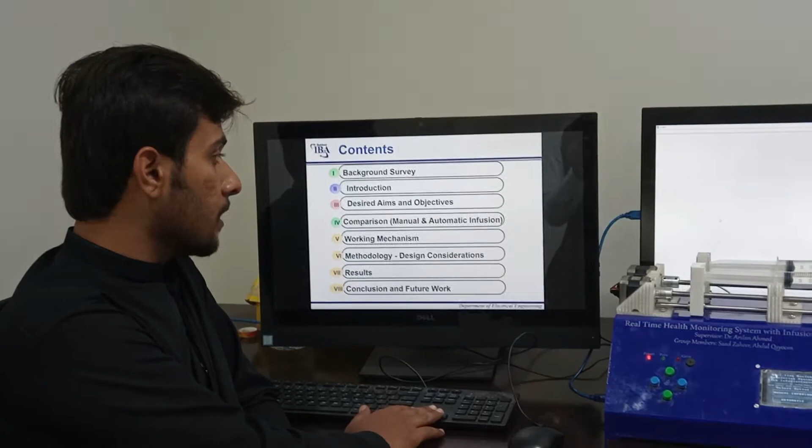The contexts which we will be dealing in today's presentation are the background survey of our project or our research, introduction, desired aims and objectives, comparison between some manual infusion systems and automatic infusions. Moreover, we will be also dealing with the working mechanism, methodology, design considerations, results, and in the ending part we will be dealing with the conclusion and some future works.

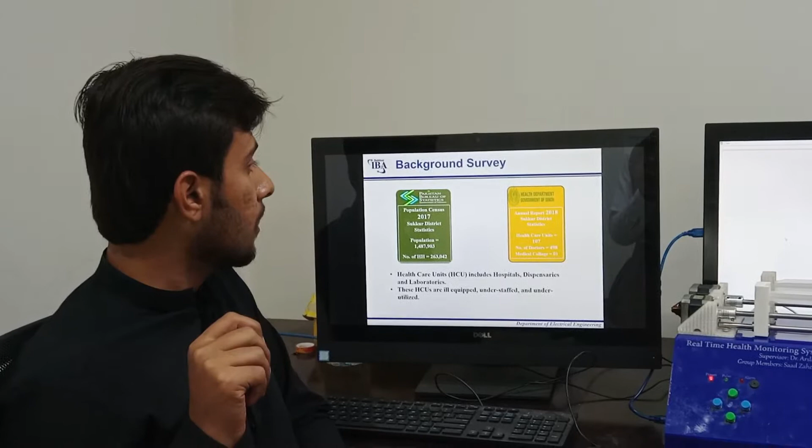If we talk about some background survey related to our health sciences, then in the 2017 census, the documented population is around 14,87,903 persons who are currently registered with the statistical census of Sukkur, and the number of households we can say is 2,63,042 houses. These statistics are being provided by the Pakistan Bureau of Statistics, Government of Pakistan, and from the Health Department of Sindh. We have received an annual report from 2018 that we have only 107 healthcare units, meaning directly or indirectly these healthcare units are the hospitals, dispensaries, and healthcare sectors, in which a total of 498 doctors are registered, and we have only one medical college in the vicinity of Sukkur district.

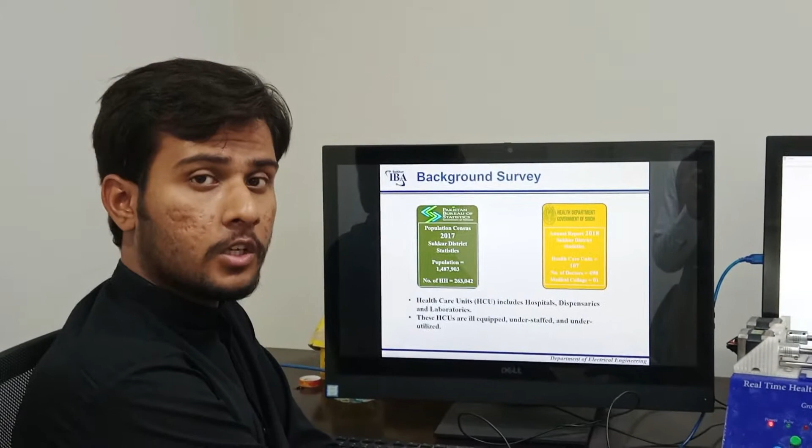If we talk about some background survey related to the intravenous infusion on which our project is based, intravenous infusion is the controlled supply of fluid, or we can say it is prescribed medication which is continuously infused into the bloodstream over time, which is the fundamental part of every healthcare unit.

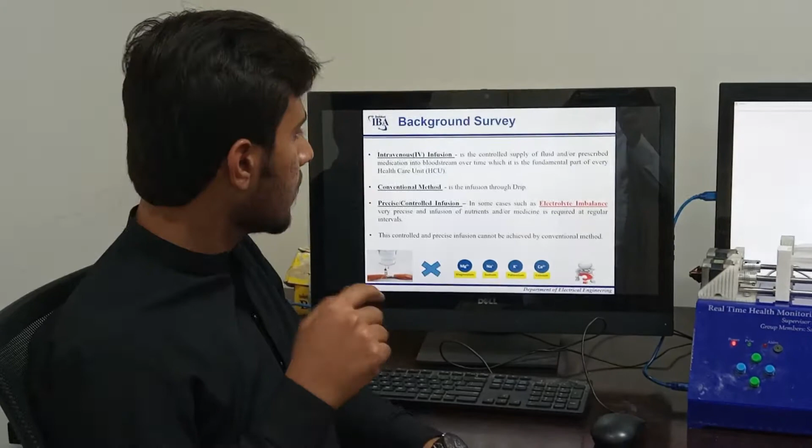The conventional type of infusing the medication, or the liquid medications, are the normal drip systems. We are moving towards automated or controlled infusion systems because in some types of diseases we need precise and controlled infusions. We can take the example of electrolyte imbalance, a common disease which needs very precise and accurate infusion of the nutrients or medicine required at regular intervals. This is the reason due to which we need controlled and precise infusions, which till now the conventional drip systems haven't achieved.

Some manual adjustments require someone constantly on site to keep the infusion flow rate constant and to prevent situations of over and under infusion. For cases that require programmed medicine or nutrition volume, infusion pumps provide constant flow rates. Such equipment, however, is very expensive, as well as becomes uncomfortable for patients, involving involuntary movements.

When we visited Civil Hospital Sukkur, we saw that there is much need of well-equipped equipment which we can provide, with which we can provide instant medications, as well as proper monitoring of the patient's health for the concerned doctor as well as the relatives. In addition, if we talk about different scenarios, we have seen in Sukkur district there is only one public sector hospital named NICVD, which has well-equipped machinery or equipment for which they can...

We are having examples like syringe pumps, health monitors, etc. This is the only hospital situated in the vicinity of Sukkur which has this, in a very limited amount. Moreover, all other hospitals have a deficiency of well-maintained setup for the local citizens also.

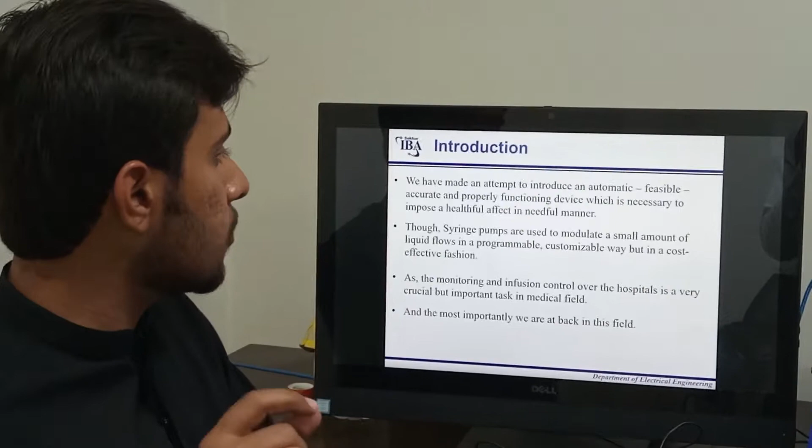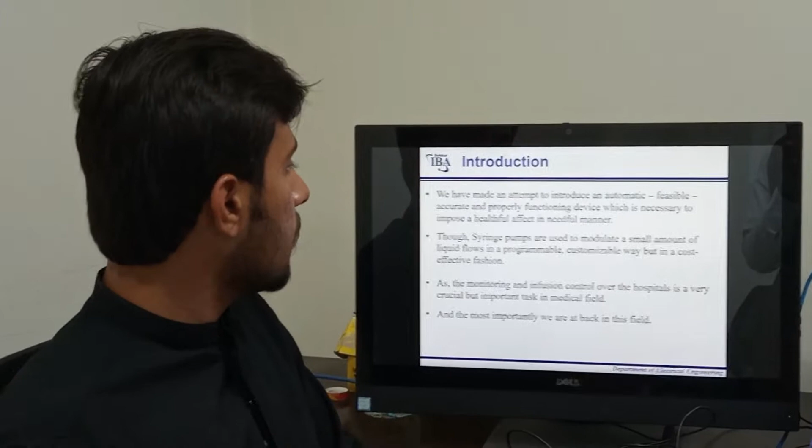If we talk about the introduction, we have made an attempt to introduce an automatic, feasible, accurate, and properly functioning device which is necessary to impose a healthful effect in a needful manner. If we talk about the syringe pumps, which is the main topic of our presentation, they are used to modulate a small amount of liquid flow in a programmable, customizable way, but in a very cost-effective fashion, which is the main point of this presentation.

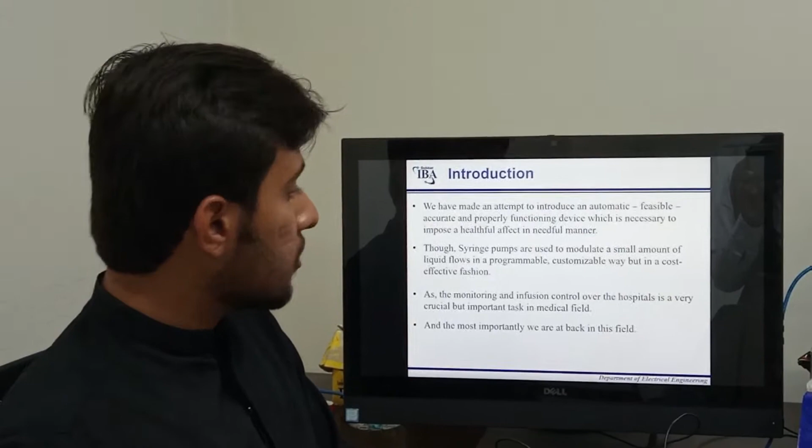As the monitoring and infusion control over the hospitals is a very crucial but important task nowadays, and most importantly, in the vicinity of Sukkur, we are very behind in this field.

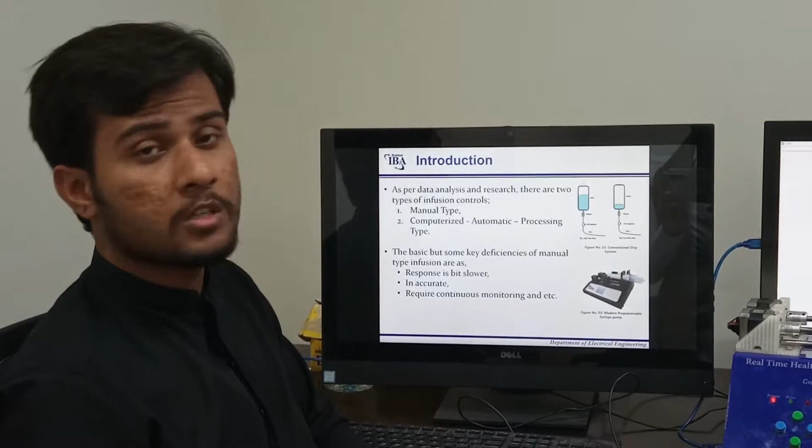If we talk about some research related to our project, the data analysis and research show there are two types of infusions: number one is manual type, number two is computerized or processing/programmable based.

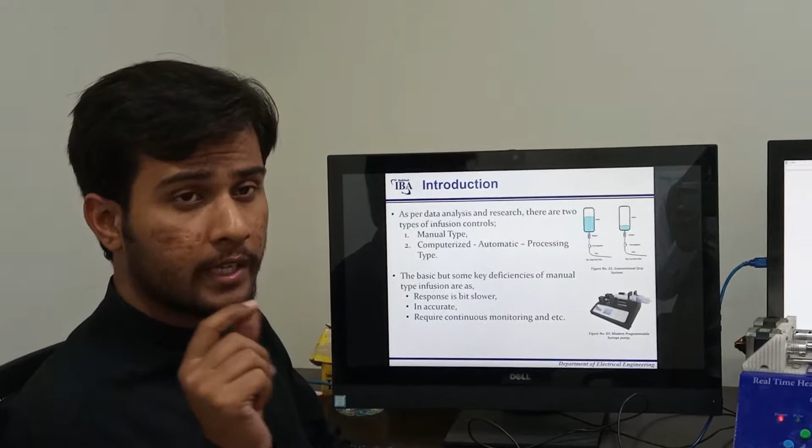The deficiencies in conventional systems are that their response is a bit slower than nowadays requirements. They are also inaccurate, and most importantly, they require a continuous monitoring setup over the system.

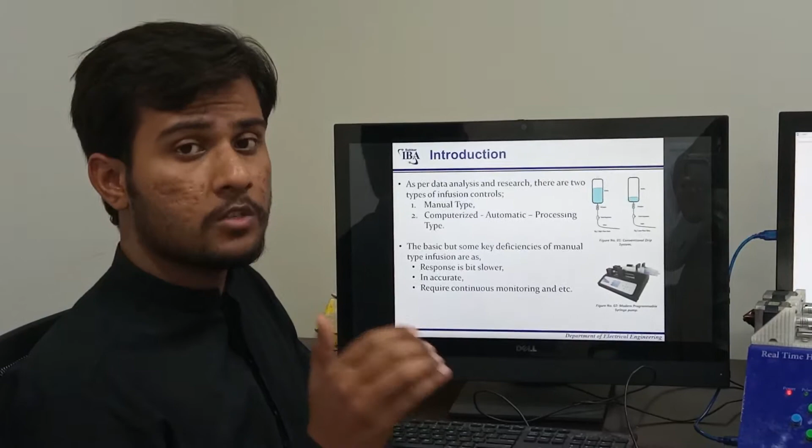In this presentation, we will be dealing with our aims and objectives, like providing a smart health system for private as well as public sector hospitals, which can provide a user-friendly interface for continuous monitoring of patients.

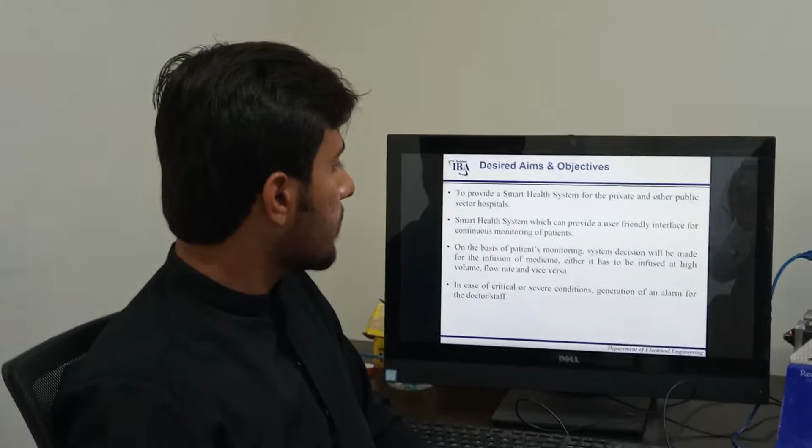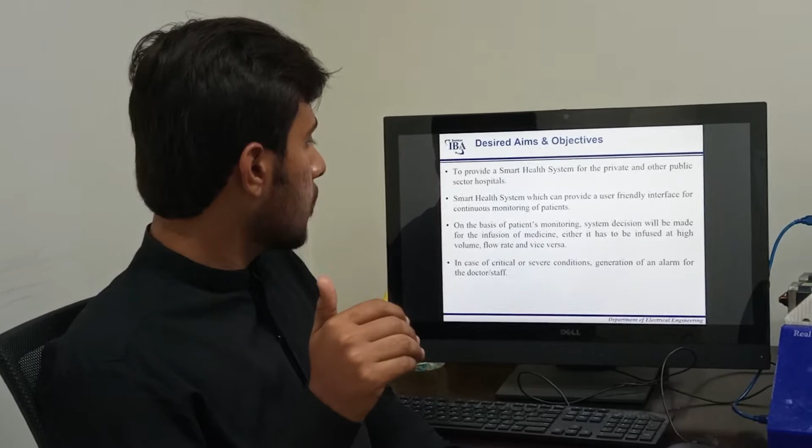Based on the patient monitoring system, a decision will be made for the infusion of medicine, either at high volume flow rate or vice versa. Moreover, in case of critical or severe conditions, generation of an alarm for the doctor is also an objective of this task.

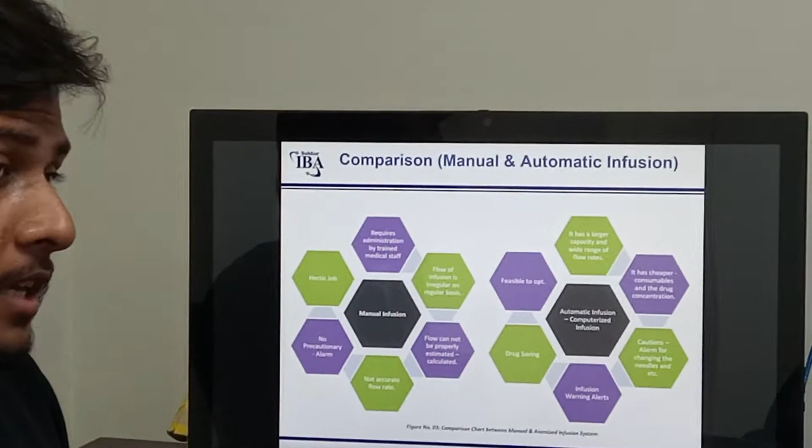Now, if we talk about the comparison between manual and automatic infusions: in manual infusion, we require administrative staff, and this is a very hectic job. Thirdly, it does not hold any precautionary alarms for severe conditions.

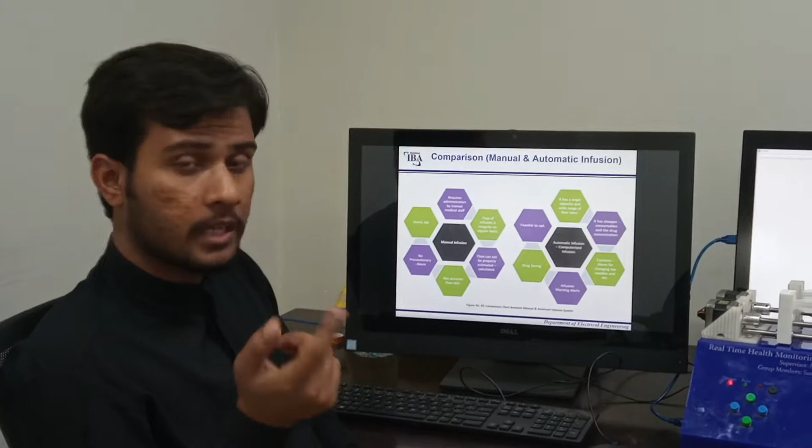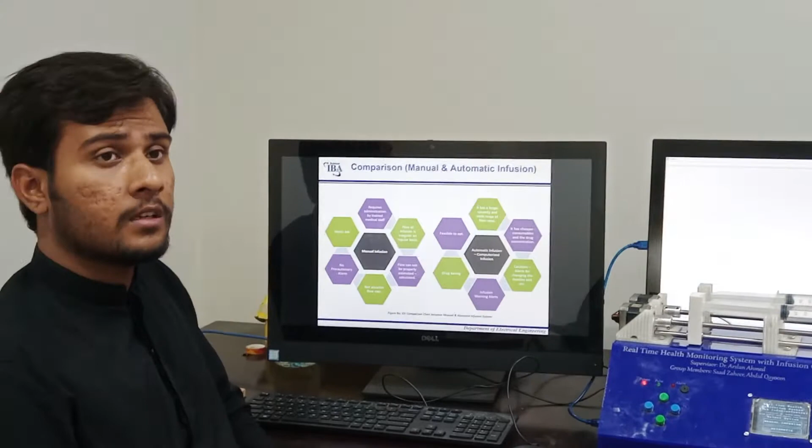Fourthly, the flow of infusion is irregular on a regular basis. Fifth, the flow cannot be properly estimated or calculated if we require a calculated and estimated infused volume. Finally, these systems are not very accurate in terms of constant flow rates.

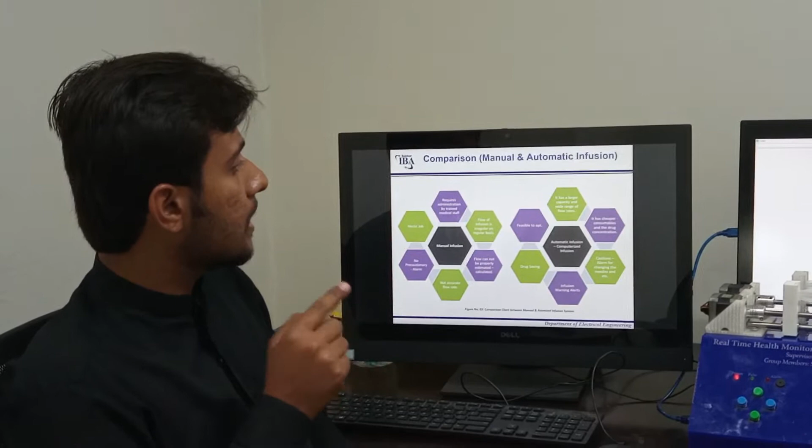Now, if we talk about automatic or computerized infusion systems, they have larger capacity and a wide range of flow rates. Secondly, they are feasible to opt for in normal situations.

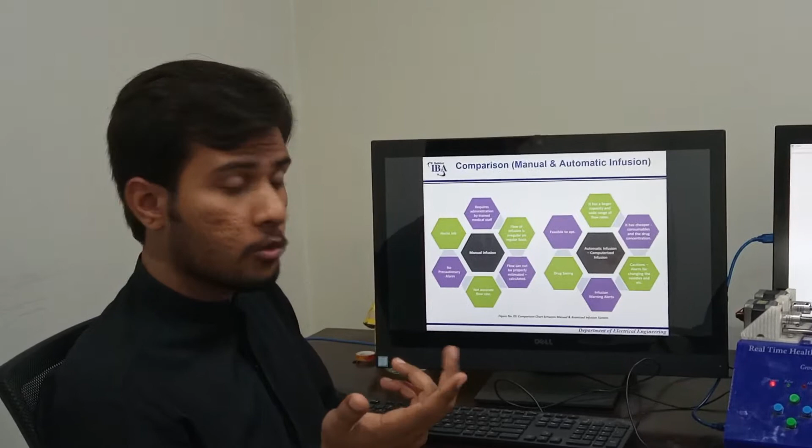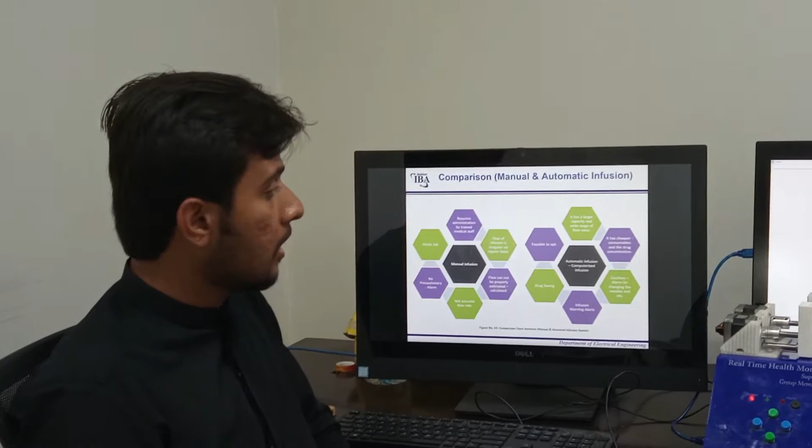Moreover, they are drug-saving equipment. Fourthly, infusion warning alerts are there, with features of caution or alarming in alarming situations. Finally, they are much cheaper compared to the conventional drip system overall.

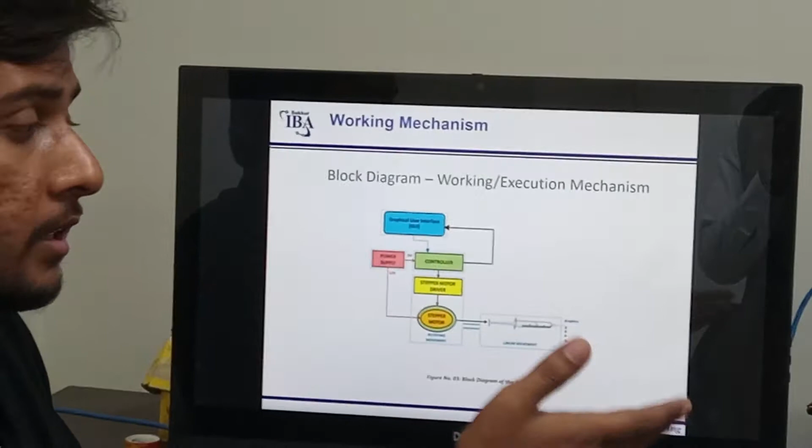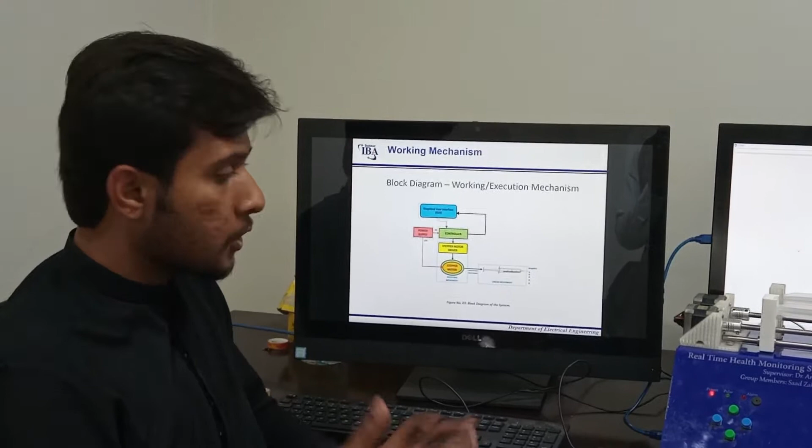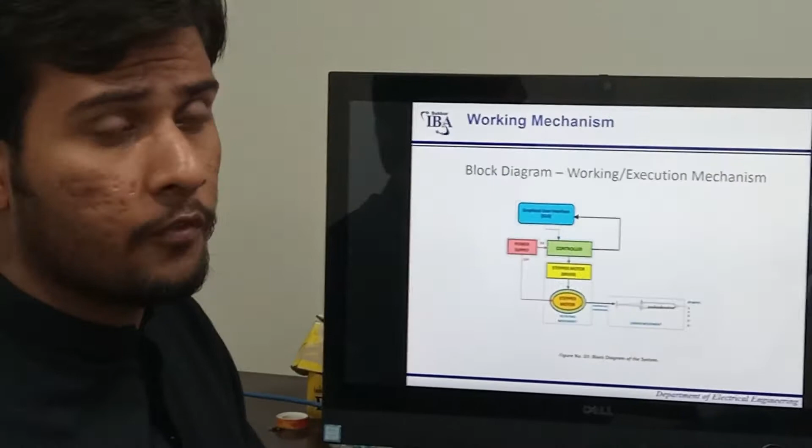This is basically the working mechanism of our project, or the prototype we have designed for this case. We will be using a graphical user interface, power supplies, controller-based boards, motor drivers, motors, and finally the most precious part of our project, the pump, or syringe pump.

So the next part will be defined by my groupmate with the methodology part. The mechanism of our project is divided into hardware and software.

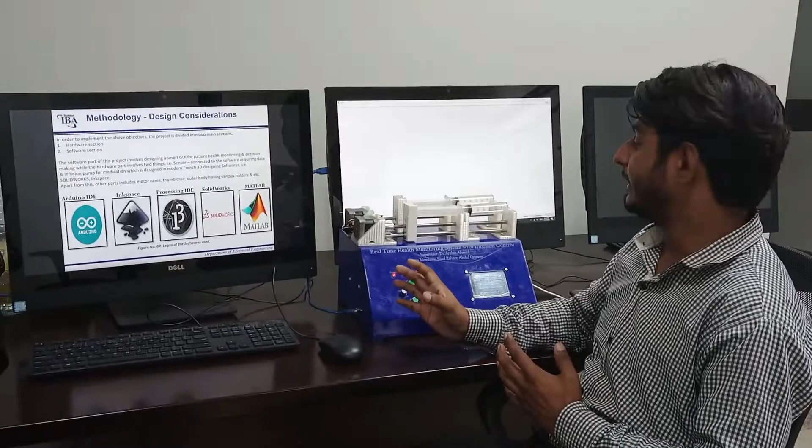In hardware, we use two methods: first was SolidWorks, and second is InkSpace, in which we have designed the outer part and the case of our project's body.

The software-based system is involved around Arduino-based software and MATLAB. In Arduino, we program the overall case of our project, and in MATLAB, we have the post-processing of our project.

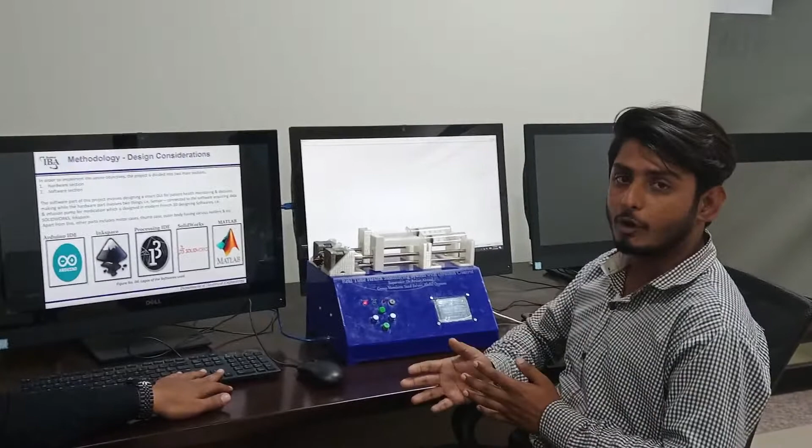These are the outer SolidWorks parts we have designed in SolidWorks. The first one is the motor holder, second one is the syringe clipper shown here, and the third one is the pusher, which pushes the syringe to infuse a fixed amount of liquid, along with the holder for the syringe.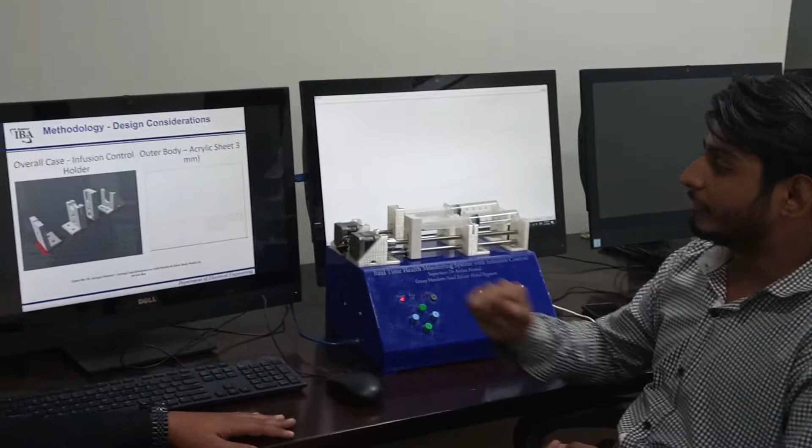Figure 1 number 5 shows the overall case of our infusion system.

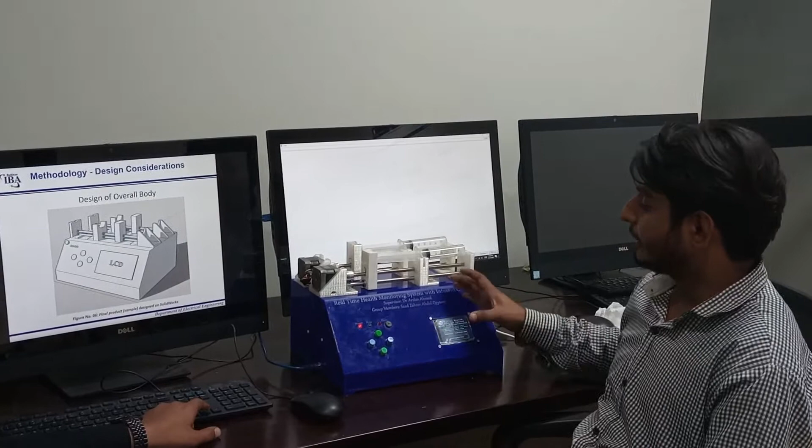This is the finalized product in which we have assembled all the cases, first the infusion syringe system, and then assembled the overall part.

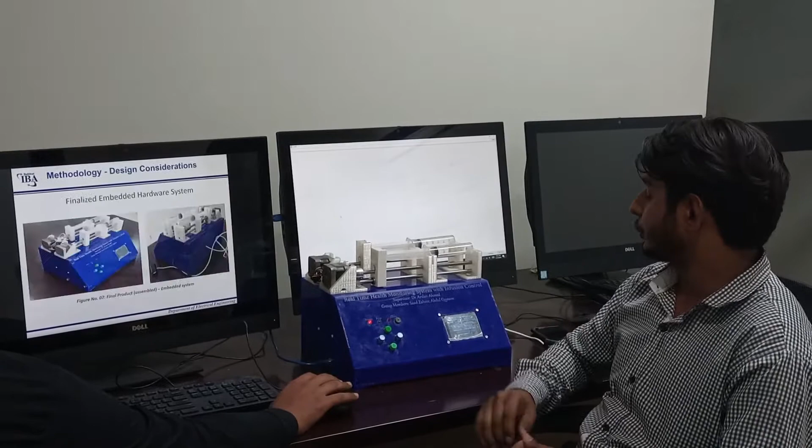The methodology or working principle for this project is as follows: the first page shows the menu, and it has two options: the first one is manual control, and the second one is automatic infusion.

In manual control, we can move manually. As we can see here, it has two options: the first one is manual movement, in which we have 4 or 6 options.

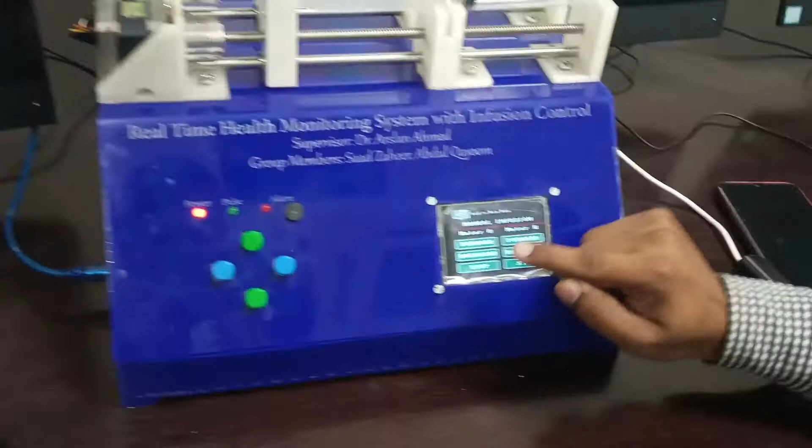The first one shows the motor A configuration, in which if we click the forward button, it will move the infusion like this. This works at the...

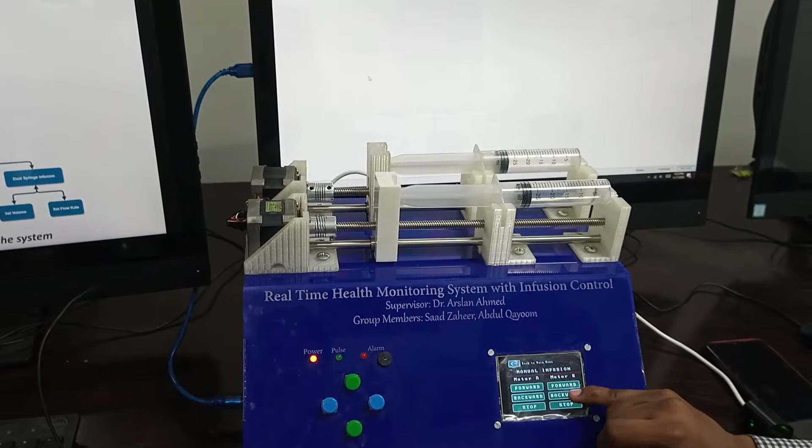So I have shown the first infusion of motor A, in which we infuse the liquid at the rate of 200 step per revolution at 2.5 ml. Now we can move to the second syringe infusion by clicking the forward button. If we click the backward button, it will diffuse the liquid.

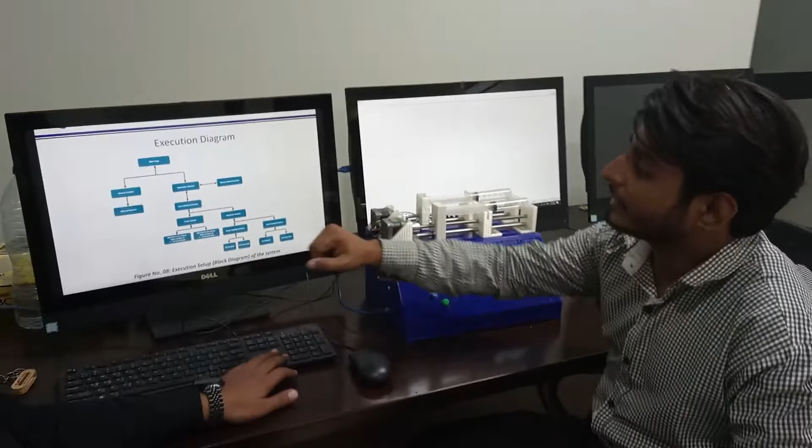So this is the manual movement, and the second part of our project is the automatic infusion. It contains sensor-based infusion and user-defined infusion. In sensor-based infusion, we use the pulse sensor device, which can detect the infusion through the pulse rate. And second is the user-defined infusion.

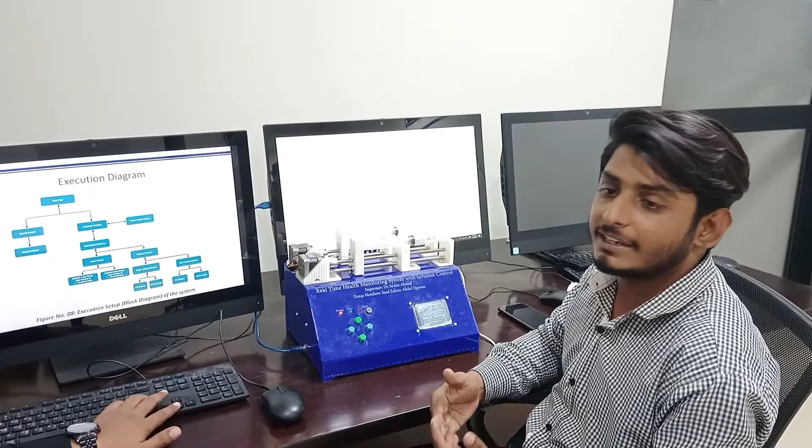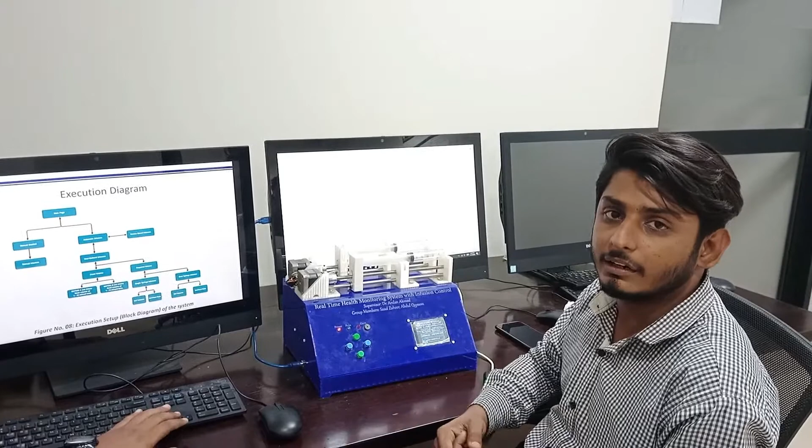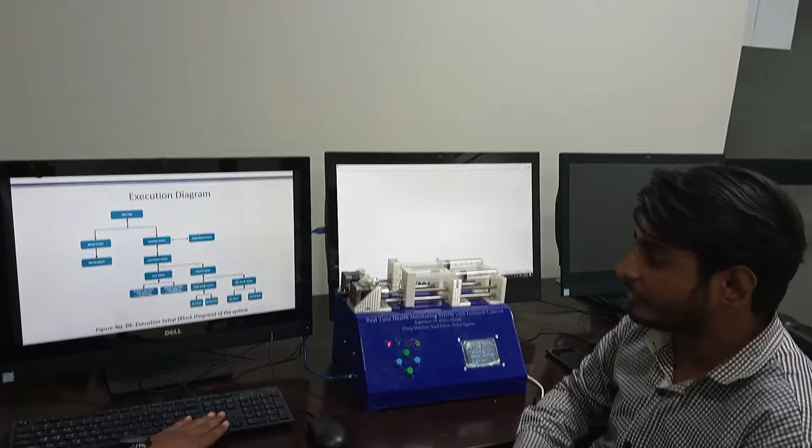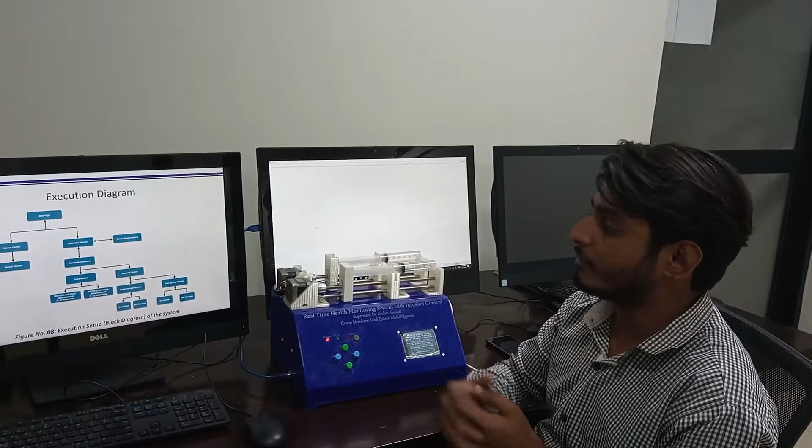And the second part of this project is the required volume infusion, in which we have two options: single syringe infusion or dual, because we have the dual system infusion system. First, if we use only one syringe system, we click at the single syringe system. Second, if we use both for mixing or combining the solution, we use the both syringe system.

So let's see how that works at automatic infusion. I click at the automatic infusion. It has two options, like user defined and sensor based. In user defined, there are two other options, like fixed rate volume infusion and required rate volume infusion.

Fixed volume infusion has two options, like motor 1 infusion and motor 2 infusion, in which if we infuse at the given rate, first infusion is done. Now we can move to the second infusion.

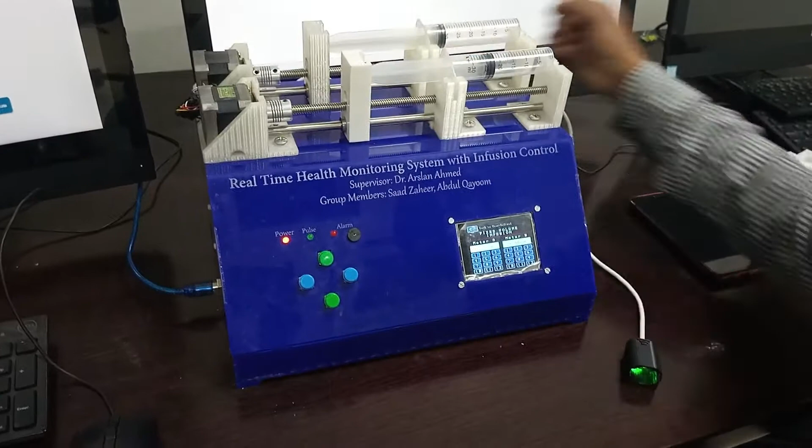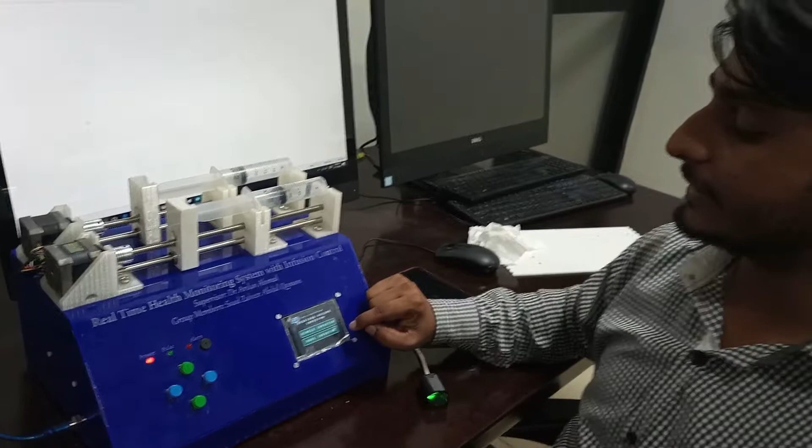Now back, we have another part, that is required volume. It has two options. First one is single infusion system, if we use the single syringe pump, and second one is the dual infusion pump, which would work for both syringe pumps.

I have selected the single. So in single infusion pump we have two options. First one is the volume, which requires a fixed volume per ml. So we select that and input the volume for infusion. I will give 10 as the infusion volume, and the flow rate for that is 2.

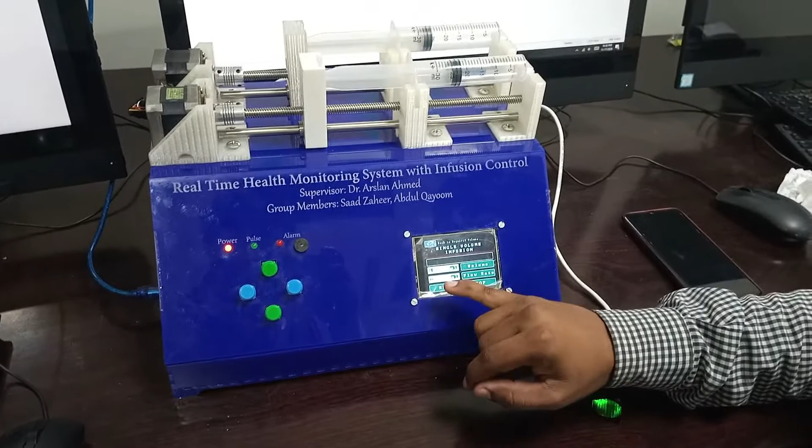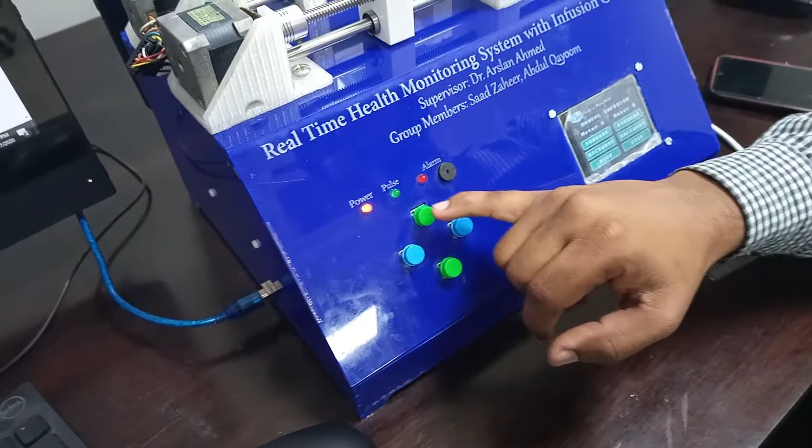So the system will infuse at the 10. In manual movement, we have these 4 buttons for infusion, forward moving and backward moving. For syringe A, upper and bottom buttons work - the upper button works as forward movement, and the lower button works as backward movement.

And these left and right buttons work for syringe B. The left one is used as forward infusion, and the right one is used as backward infusion.

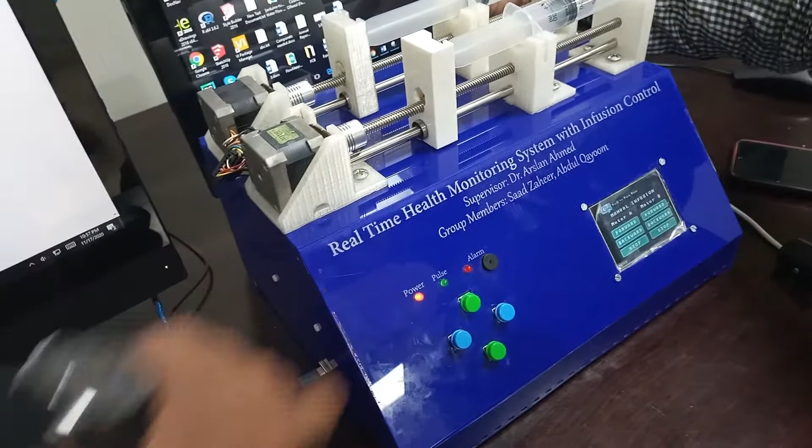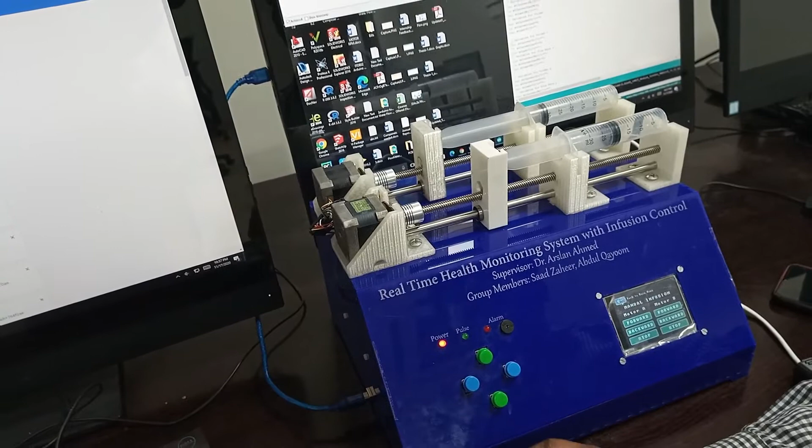So currently my system is on, so I am at the manual movement infusion. I click the upper button, so the system is working. Syringe 1 is infused like this, and if I click the bottom button, the system is diffusing the liquid like the same.

The second syringe is infusing and then diffusing. Now we are seeing the sensor based infusion. For that we have placed the sensor at the index finger and open the menu. So it takes some time to set the pulse.

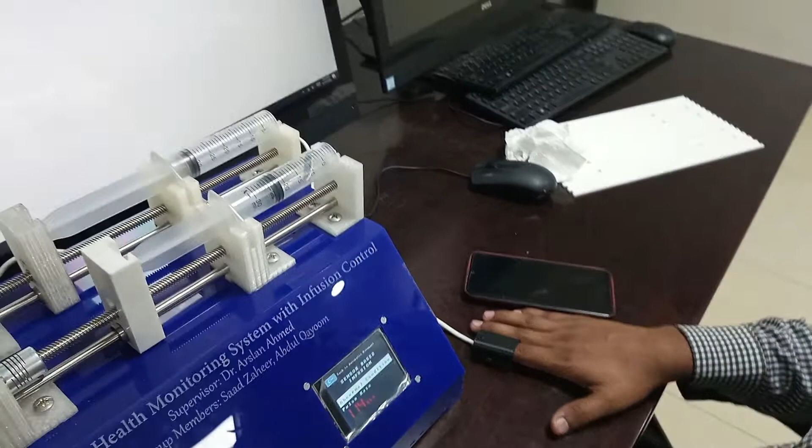So my system is working. So the methodology we use is the step per revolution, which is for the manual infusion, at 200 SPR. That's constant for my manual infusion, which requires changing the syringe in case of infused volume.

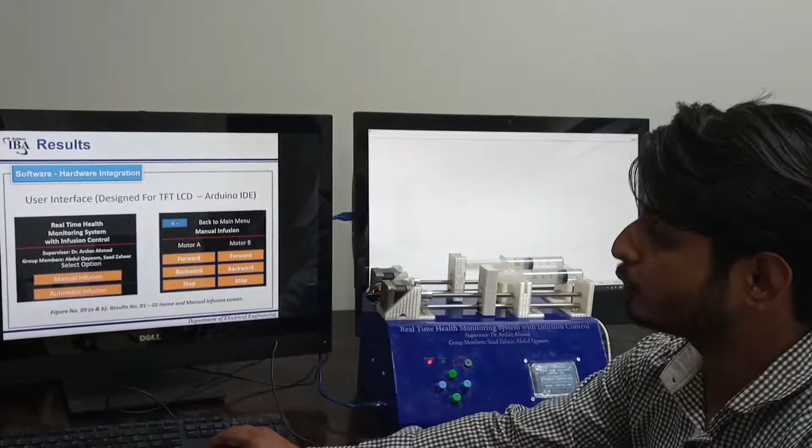And the second is the automatic user defined, which I have already seen in my project that works for that. So these are the manual infusion interfaces I have designed for my project. First was my home screen, which has two menus like manual infusion and automatic infusion.

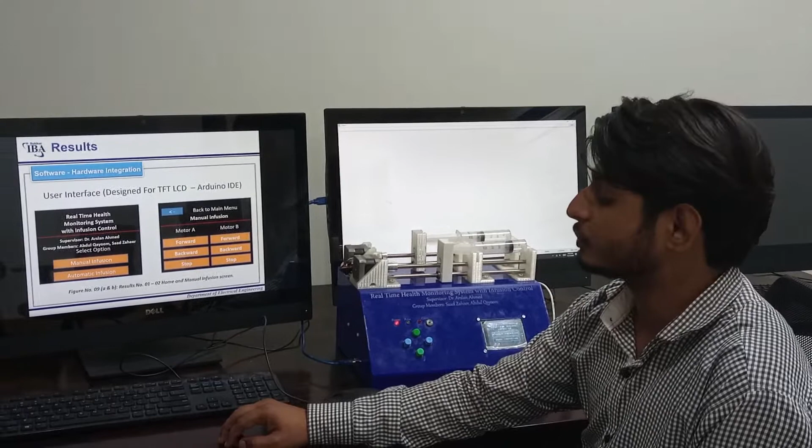The manual infusion has these 6 buttons which contain forward, backward, and stop buttons. And the third screen is for the automatic infusion that contains 2 buttons, user defined and sensor based. User defined contains 2 infusion buttons for fixed volume and required volume.

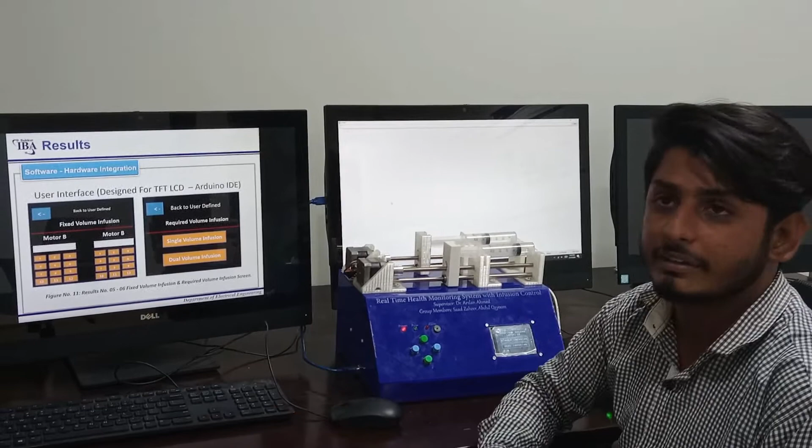And for fixed volume we have 1 to 12 volume we can infuse. And for required we have 2 options, single syringe system or dual syringe system. For that we have to set the volume and the flow rate for the infusion. For single we set it, and for dual both we have to set both volumes.

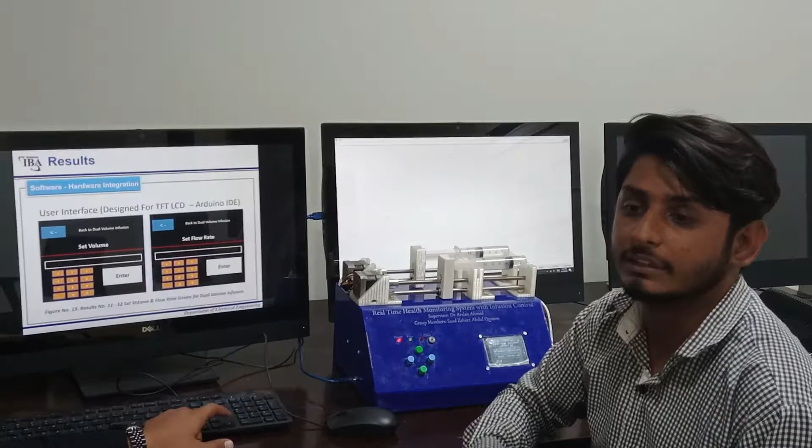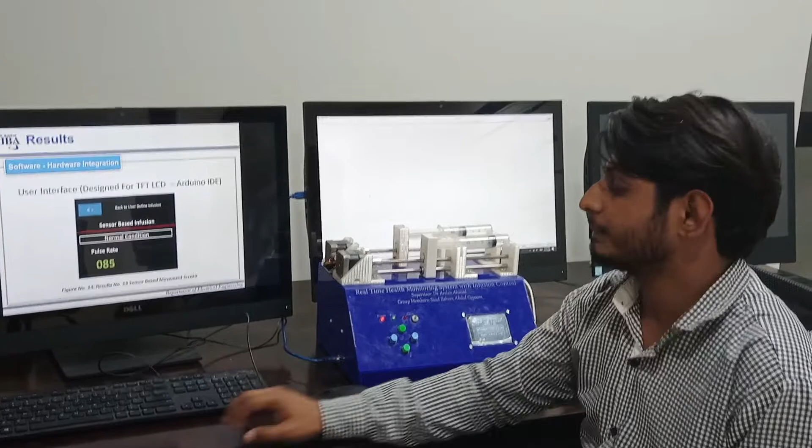First, how much volume we have to infuse and what rate we want to infuse the volume. And the sensor based, it detects the pulse, and on the basis of the pulse rate it infuses the volume. It contains the threshold for the pulse rate, set at 60 to 100. If the pulse rate is greater than 100 or less than 60, the system will infuse the volume to the patient.

So this is our project video.

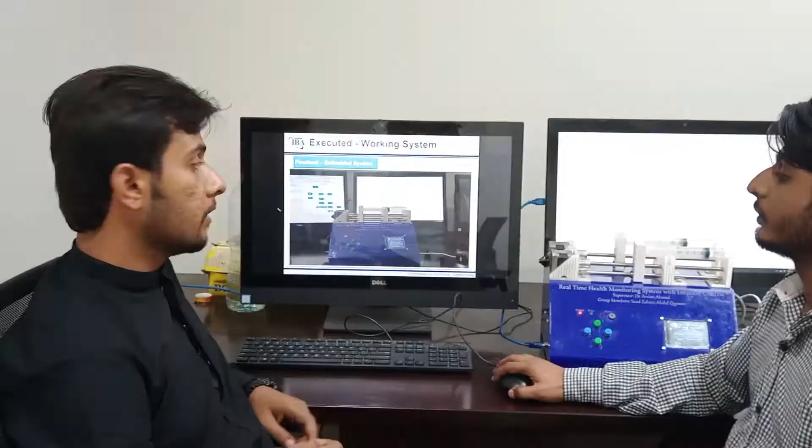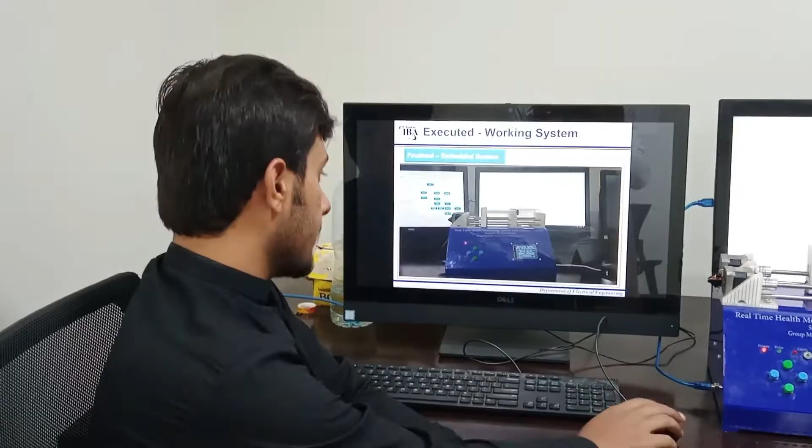Let me take my position back from a group mate, and I want to add something to the current working system which we have been designing since last year. We have designed it so that whenever we put the power onto our system, we have basically two options: manual infusion and automatic infusion.

In manual infusion, we have two more options, like we have both pumping actions, pump A and pump B, for the forward, backward and stop actions.

Moreover, in the required volume infusion we have two features in our syringe pump, or our embedded system. Number one is the use of a single volume infusion pump, and secondly the dual volume infusion pump. Both these conditions can be used as per the need of the patient, or the scenario.

Moreover, if we talk about sensor based infusion, we have used the pulse sensor model AD8232, for which we are monitoring the pulse rate of a patient, or that person who is at complete bed rest.

We have set two thresholds: lower than 60 beats per minute and greater than 100 beats per minute. As per the doctors and our background study, the normal beats of a patient are in between 60 to 100.